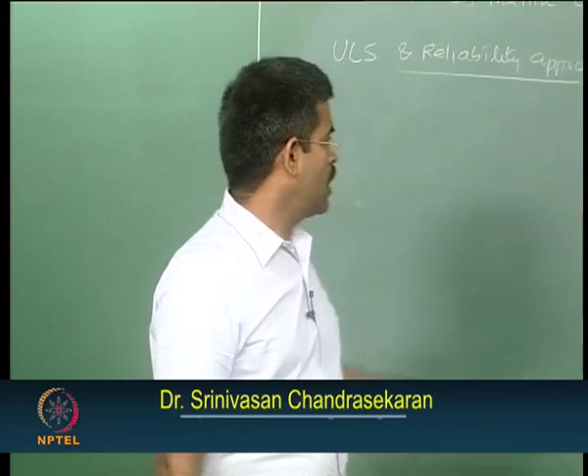In the last lecture we explained how the ultimate limit state in terms of design mechanism, how the partial safety factors can be connected to a reliability approach where R and S are seen as variables in reliability approach, random variables, whereas in design they are not directly seen as random variables, but the effect of their variations or uncertainties are accounted for in terms of using or substituting partial safety factors of load effects and resistance, that is gamma Si and gamma R.

One should be able to estimate these values using reliability theory. Therefore, one can determine deterministically what would be the probability of failure if you are using a specific characteristic value of the load and that of the strength, and using specific safety factors for load and resistance respectively. Now, let us look for

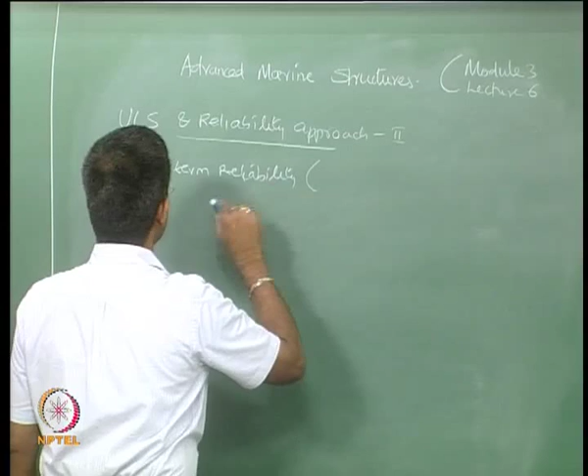short term reliability. To make it easy, let us consider this for a single load effect.

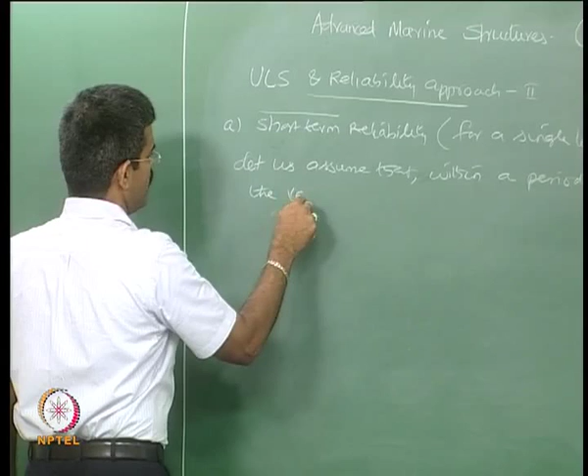First of all, why do we call this a short term reliability? Let us understand or assume that within a period of time, let us say t, the variation in resistance is not valid. What does it mean? It means R does not vary much, not significantly.

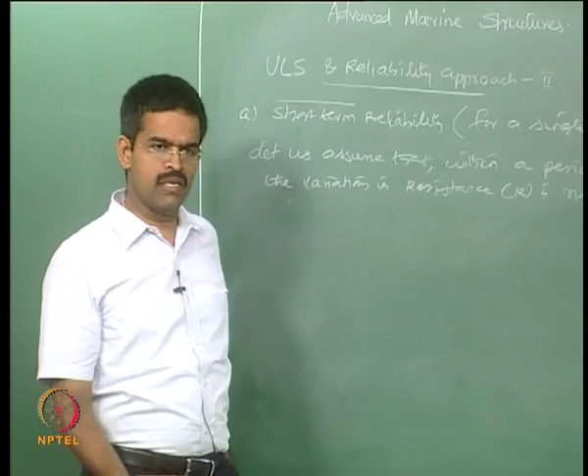This can be true because using the same material for a period of, let us say, structural life of 15 years, and the material has got very high quality control in terms of its manufacturing processes, the variation in terms of its yield strength, modulus of elasticity etc. can be ignored, because the variation practically will not be there, though the variation will be there because of strength deterioration, degradation etc. But let us assume that for a specific short term period, that t we will fix, maybe 1 year, maybe 6 months, maybe 10 years.

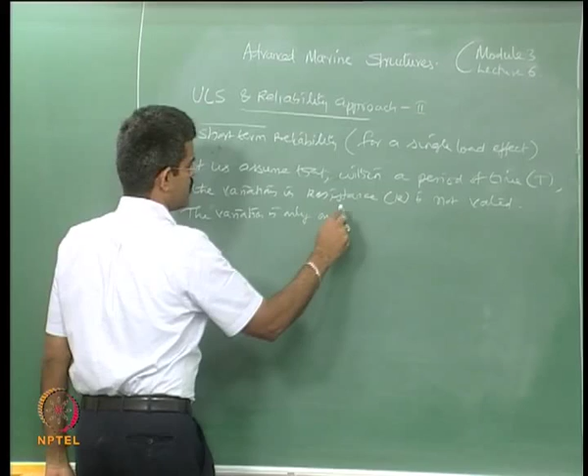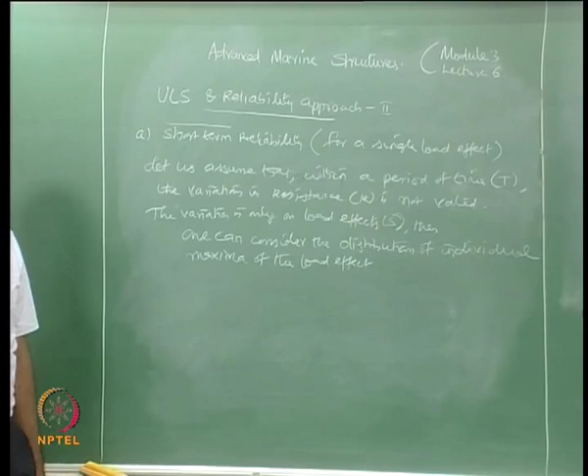For a specific period, if R does not vary, the variation is only on the load effects. Then one can consider the distribution of individual maxima of the load effect, which could be the largest value within the period t. You can consider the largest value, what we call maximum.

In that case, the reliability problem can be framed using what we call extreme value statistics.

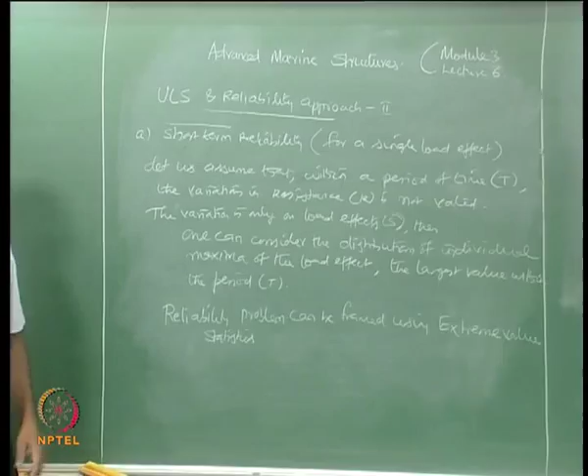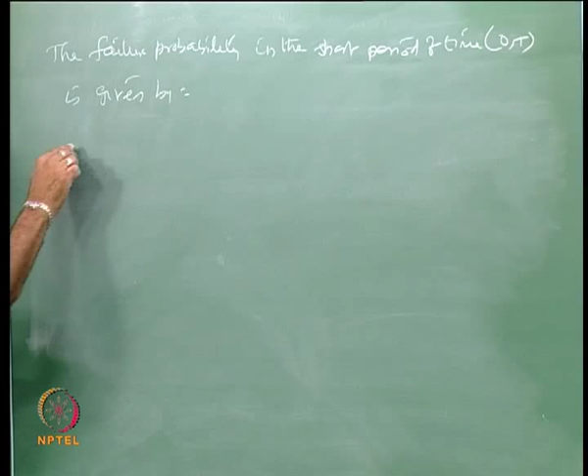So, the failure probability in the short period of time, that is 0 and t, is given by Pf, which is now meant for a specific time, let us say Pf of t, because t is the period where I am looking. One can say however the time period of t is very large, still I can call this a short term, because considering the design period of 100 years, considering the service life of 25 years, any value you take can be considered as a short period or short term.

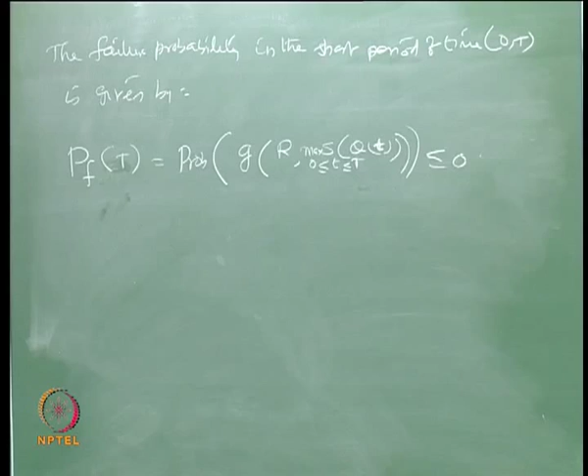So, probability of g of, that is the failure function, which can be a function of r and s max, or let us say s varying from 0 less than t less than t, t is between 0 and t only, and we can now look for maximum of s amongst Q of t, which can be less than or equal to 0. Let us take Q of t, where t is a variable here. This can also be rewritten as the failure function, that is probability of g of r comma s max. I am saying this is an S max value within a period t, which can be less than or equal to 0. I will call this equation number 1.

So, what I am trying to say here is, if the resistance is not considered to vary within a specific time t, consider only the maxima of the load effect, form a failure function and find the failure probability. That is what we call short term reliability.

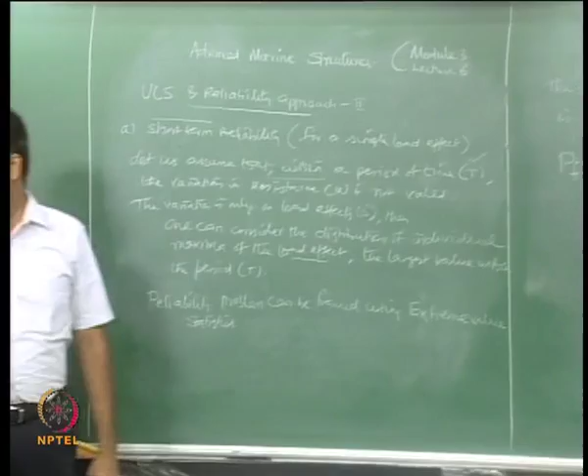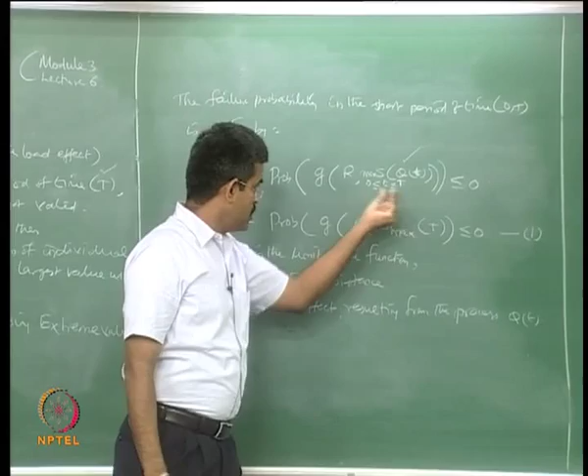Where g is the limit state function, written as g of some function, some parameters. In my case r and s are the parameters. R is the resistance, and S is the load effect, resulting from the process Q of t, that is the load process. I am looking for the maximum value in the given load process within a period 0 to capital T. I can also call that S max. That is what the language of this failure function means.

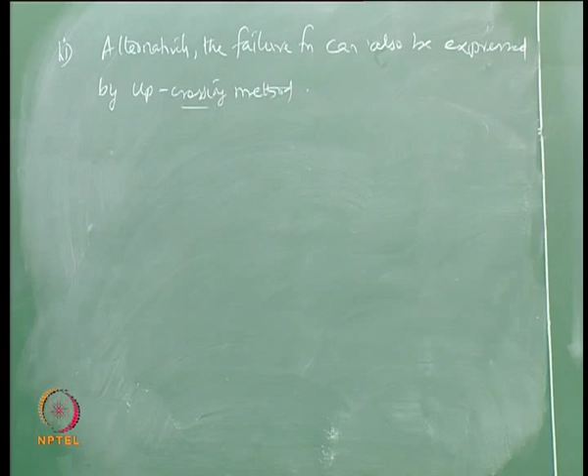There is another approach, a second approach for this. Alternatively, the failure function can also be expressed by the upcrossing method. Let us see what this upcrossing method is. In this method, the upcrossing rate is established.

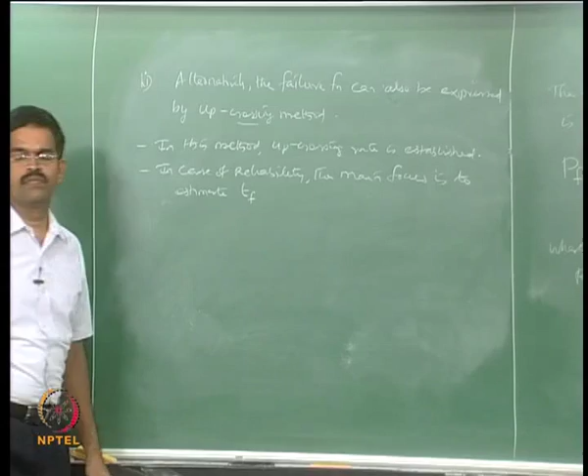So, in case of reliability, the main focus is to estimate T suffix f, where T suffix f is the time of first failure.

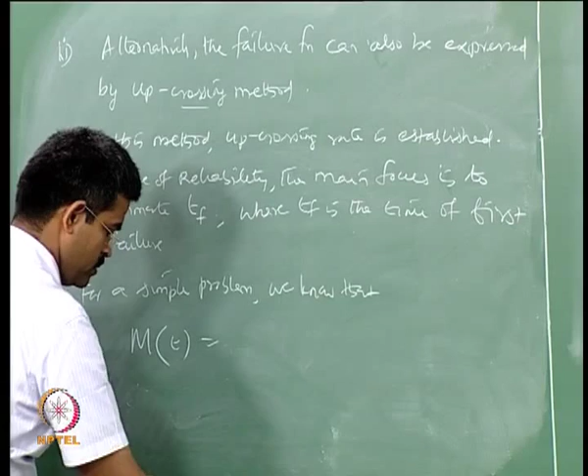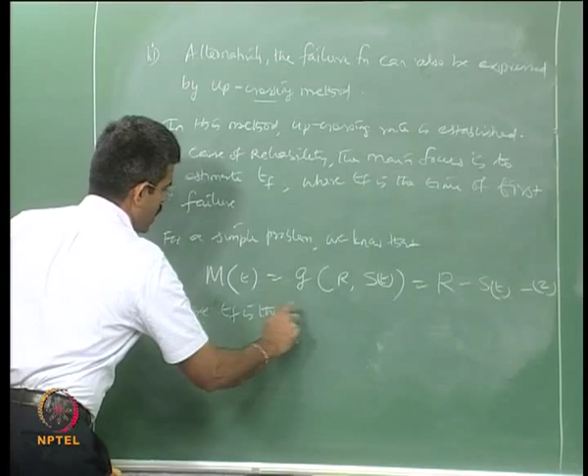So, for a simple problem we already know that the safety margin m of t is a function of r comma s of t. I think you will agree that I am not writing r as a function of t, since we already said that r is not varying, which gives the margin of safety as equation number 2: r minus s of t, where Tf is the first time when m of t is 0, that is, failure.

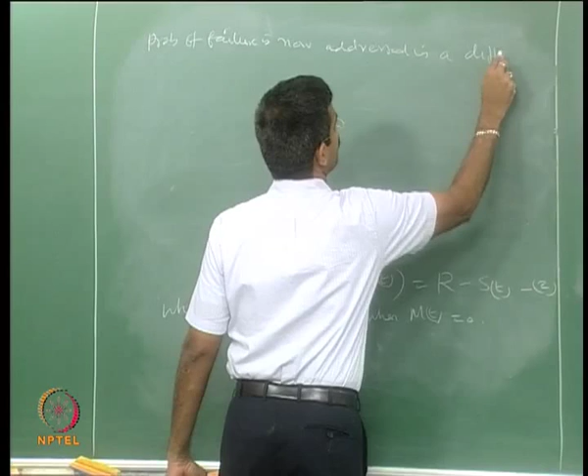So, probability of failure is now addressed in a different form, as given below. Instead of looking at r exceeding s or s exceeding r, I am now going to look at what is the time when m of t becomes 0, and what is the time at which this occurs for the first time. I am just rewriting the problem into a failure function and writing this probability of failure in terms of estimating Tf, that is called the upcrossing rate approach.

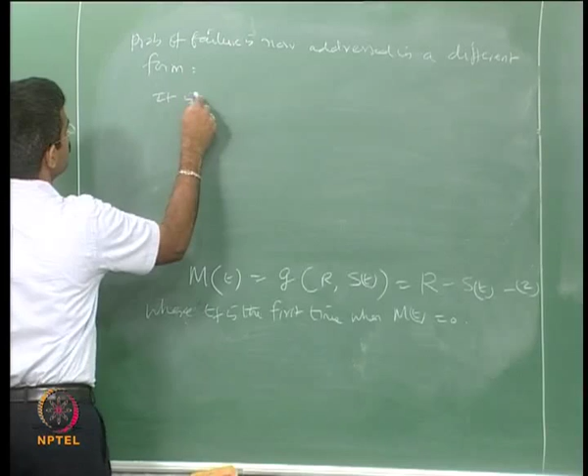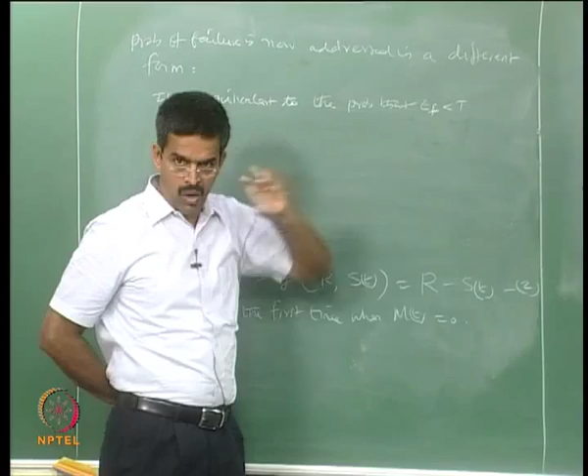So, it is equivalent to the probability that Tf is less than t. It means within your short term time t there is going to be a failure, that is what probability of failure is. If within your capital time t the failure does not occur, the probability of failure is 0, 100% reliable, is it not? So, I am looking at the problem in a different perspective, saying what is the probability that Tf less than t can occur. What is Tf? Tf is the time at which the first failure has occurred. Is it very clear, right?

So, I am looking for a short term reliability where I am trying to find out the upcrossing rate of this function, which is r minus s or margin of safety, and what is the first time at which this is going to occur, and what is the probability that this will occur within t. That is my problem now.

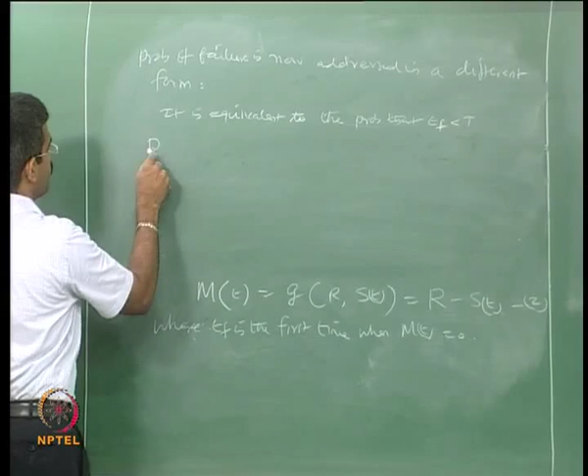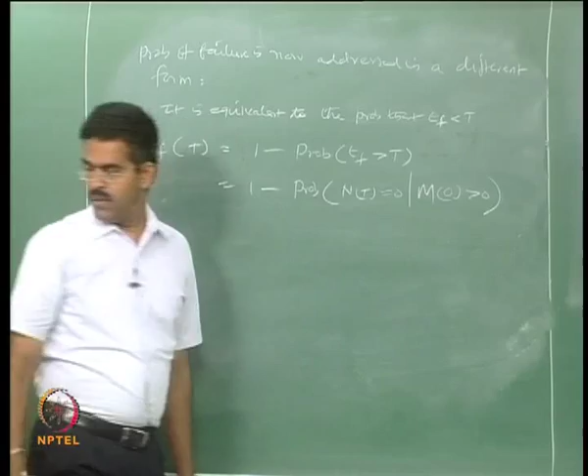So, I can write the probability of failure now as a function of t, which is 1 minus probability of Tf greater than t, is that correct? Because Tf less than t is a failure, which can be said as 1 minus probability of n of t set to 0 given m is the margin of safety, m of 0 greater than 0, multiplied by probability of m of 0 greater than 0. I call this equation number 3, 3a and 3b. There is a multiplication here, I do not have space so I have written it like this.

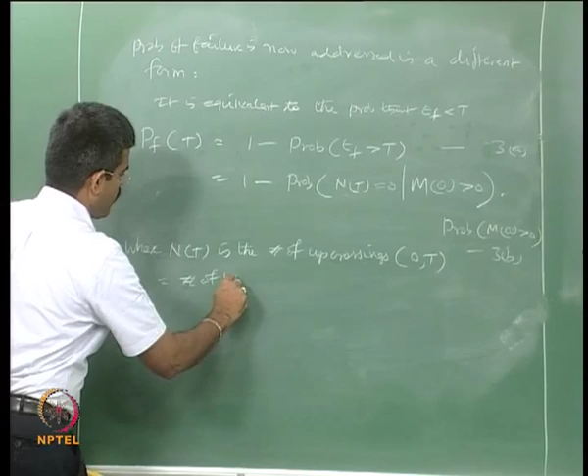Now, the question is, what do you understand by n of t, where n of t is the number of upcrossings within the interval 0 to t. Since I am saying n of 0 to t, that is the number of upcrossings from the safe domain to the failure domain. I mean, how many times your margin of safety is not satisfied.

What is margin of safety? R minus S of t. If R minus S of t is set to 0, it is on the border. So, you must first know the condition, what is the margin of safety. Given that condition, how many times this has occurred, that will be the probability of failure.

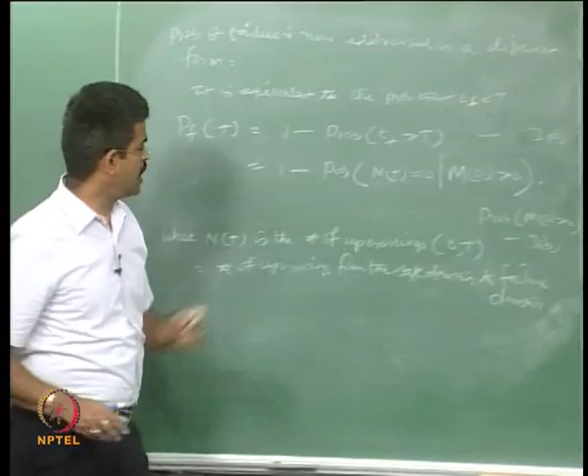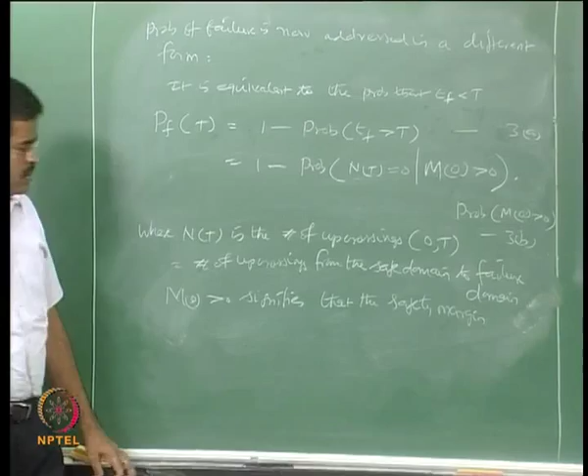Now, in this case, m0 greater than 0 signifies that the safety margin, what do you mean by m greater than 0? R is greater than S. Is it safe or unsafe? Safe. So, m greater than 0 indicates safety margin, where m of t is R minus S of t, is in the safe domain.

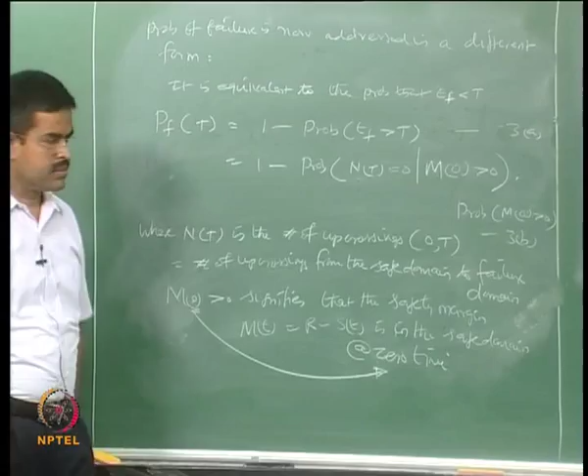At 0 time, that is why I have used 0 here. At the 0th time this will be applicable, it is safe. Now, from 0 to capital T, what is the probability or how many number of times this has been violated? That is my probability of failure. Now, in this example or in this derivation, calculating Pf of t is a complex task.

It is a complex task. Therefore, an approximation is made, an approximation of n of t.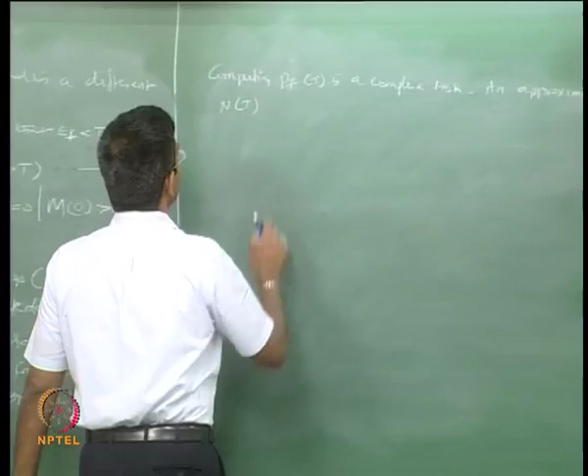n of t is assumed as Poisson's process, and this is adopted to compute Pf of t.

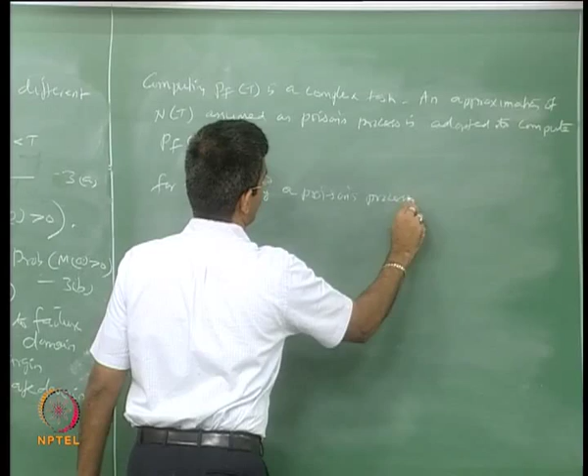What does it mean when I say n of t is a Poisson process? It means that for n of t being a Poisson's process, the upcrossing level of R and S of t are independent. They happen independently.

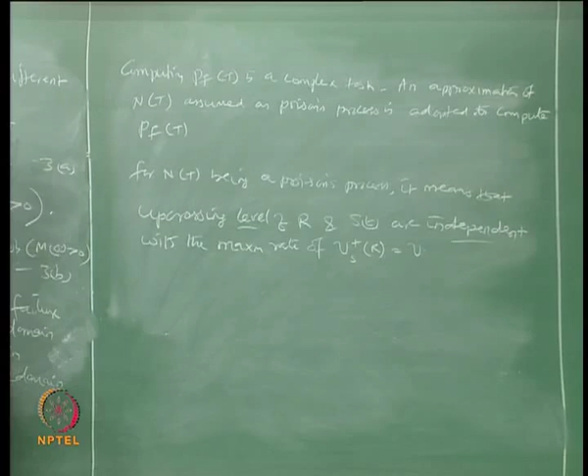With the maximum rate of Vs plus R is equal to Vm minus 0. So, whereas Vs plus R is the maximum rate of upcrossing, it is indicated as Vs plus R, and this happens per unit time.

That is why it is called the rate of upcrossing. So, now probability of n of t exceeding 0 upcrossing, or let us say equal to 0, because upcrossing means it is 0.

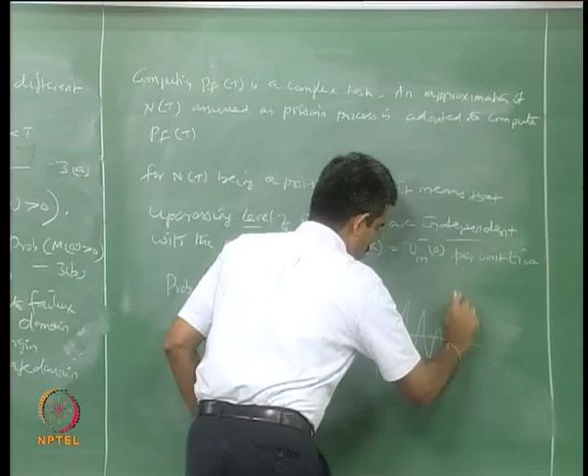You have a signal, for example, you want to find how many times the signal has crossed 0, you look for only the forward slopes, and so on, how many times it has crossed in a given t. So, for identifying the forward slopes you must look at this value equal to 0.

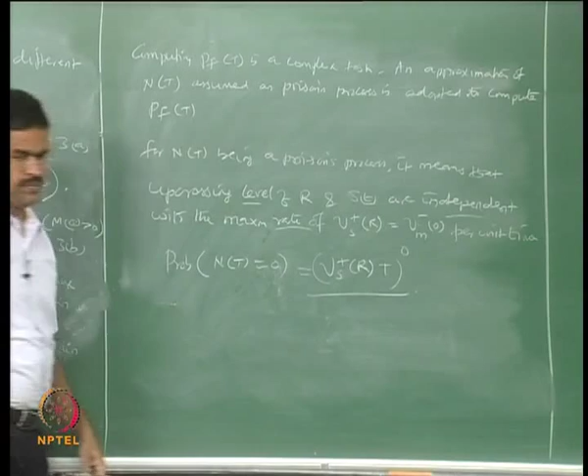So, probability of n of t set to 0 can be given by, now using the maximum rate of upcrossing, Vsr plus now, Vsr, this is R, of t to the power 0, divided by 0 factorial, that is a general expression.

E to the power of minus Vsr of t, which can be simply E to the power of minus Vsr of t. Can call this equation number 4a and 4b.

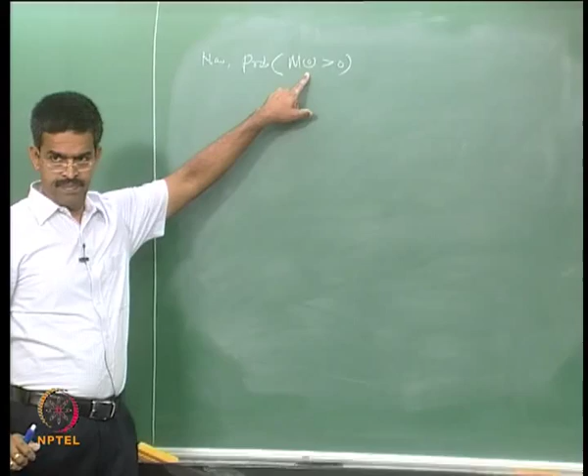Now, the probability of m0 greater than 0, that is safety margin at the 0th time, is nothing but 1 minus probability of failure at 0, is it not? Which means that there is no failure at t equals 0, agreed?

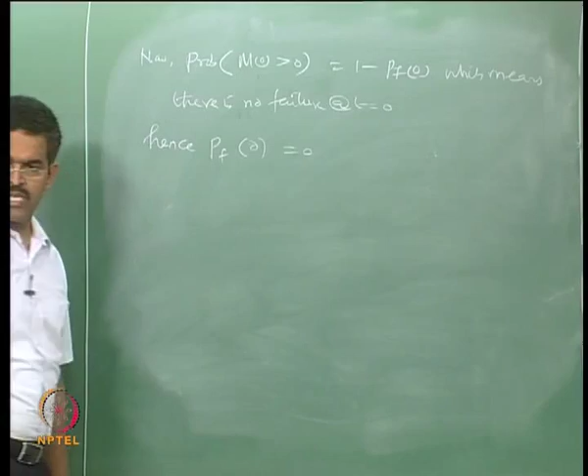Hence, probability of failure at 0 can be taken as 0 because there is no failure at 0. Then probability of failure at t can be approximately given by 1 minus, using this, e to the power of minus.

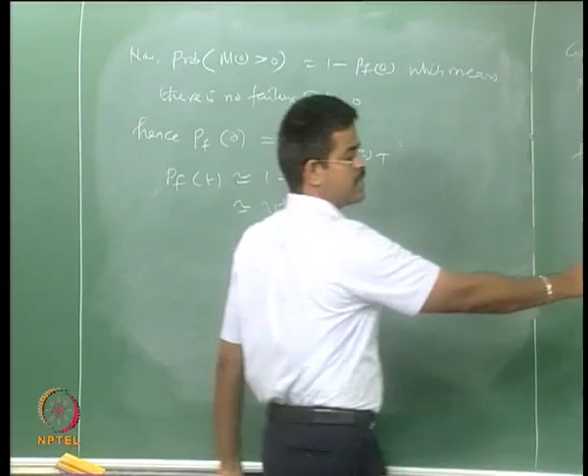Vs plus r of t, which can be approximately Vsr of t, this is approximate, which can also be said as, we already said this here, Vm minus of 0 of t, called equation number 5.

Now, as a special case, if S of t is a Gaussian process, then V of s plus r can be said as V of 0 exponential of r minus mu s, the whole square by 2 sigma s square. It is an exponential value. I call this equation number 6.

Where V0 plus this value is the same as Vs plus of 0.

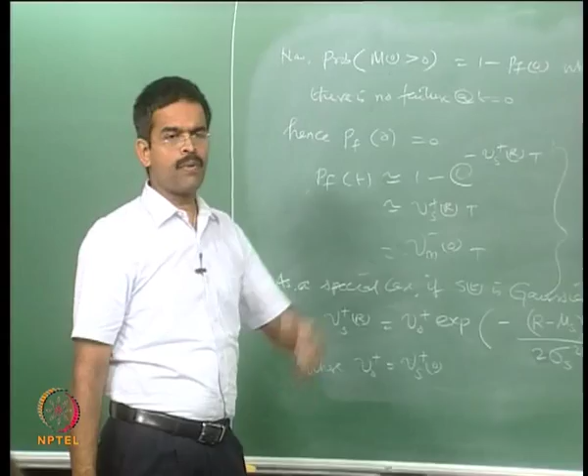So, this is a second approach by which I can find out the probability of failure using the upcrossing rate, Vs plus R0, for a short term reliability where R is not varying significantly, whereas load effect S is varying significantly within a period of 0 to capital T, and I am looking for Tf, which is the first time at which this failure has occurred, and n number of times this failure has occurred or the margin of safety is violated, thinking that at 0 it is absolutely safe.

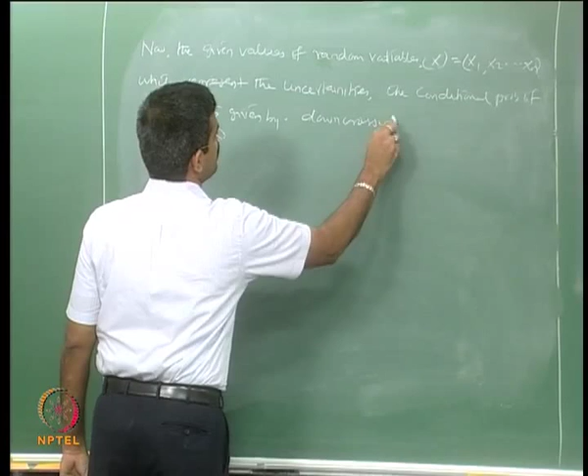The down crossing of m of t. So far we have been seeing the upcrossing of m of t and x, for t greater than 0.

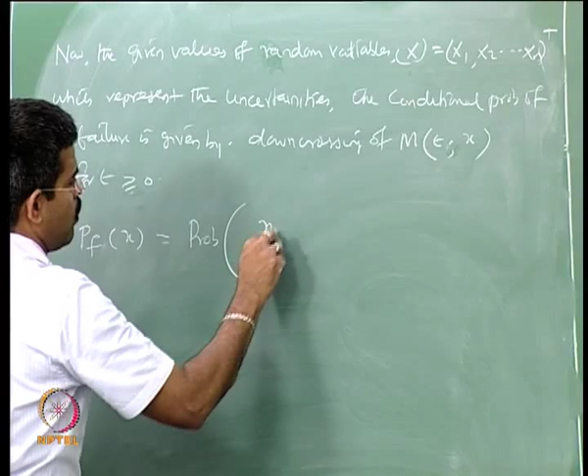So this can be given by the probability of failure of x, which is a random variable, varies from x1, x2, x3. Please make a correction here, the random variable is a transpose of this, it is a vector, can be given by the probability of minimum value of, earlier we looked at the maximum value, if it is S effect. Now I am looking for the margin of safety, so I should look for the minimum effect.

Marginally it is unsafe or safe, margin of safety. So minimum value of 0 less than t less than capital T, same argument, m of t given x, for a given set of x I am looking at m less than equal to 0. What does it mean, less than equal to 0? R is less than S, so it is unsafe.

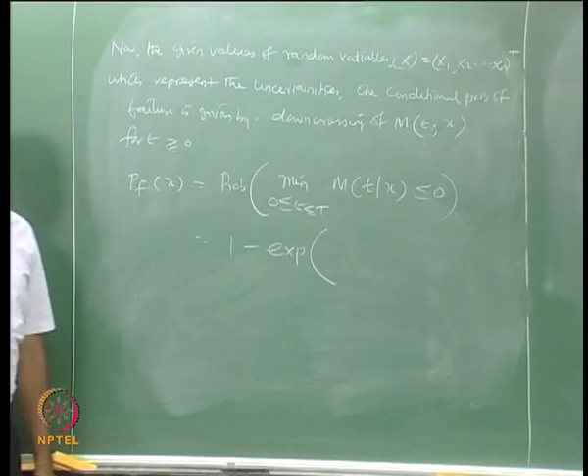That is a failure, which can be said as 1 minus exponential of minus Vm minus of 0. I am looking at the down crossing, therefore I am putting minus here. Down crossing means negative, which is happening, arguments are 0 and x for a given t.

I can call this equation number... 7, 0 of t. Let me check this expression.

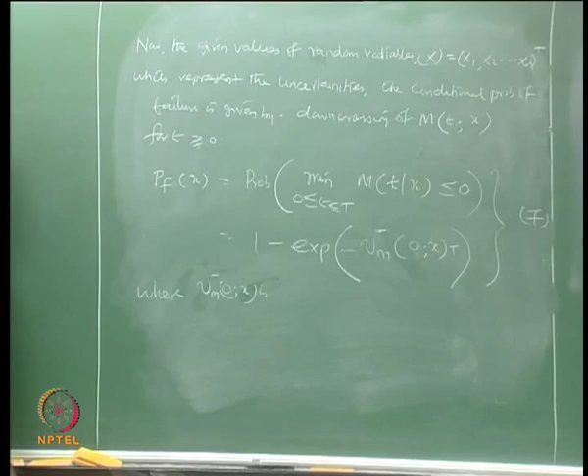Where Vm minus of 0 x is a 0 down crossing rate of margin of safety, which depends on the vector x, and the vector x is a function of r and s. Okay, margin of safety is nothing but r minus s.

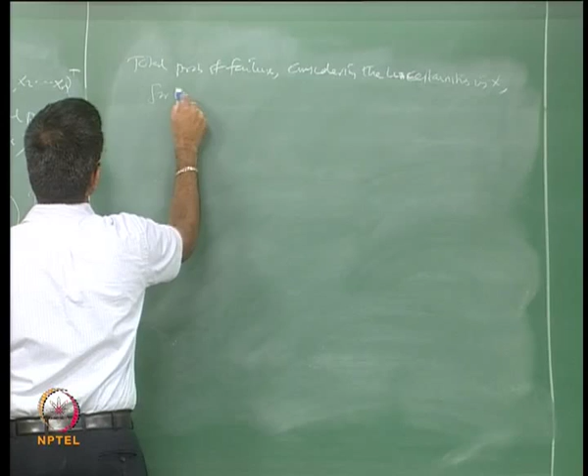Now, the total probability of failure considering the uncertainties in x, for the given conditional probability, can be said as probability of failure. Okay, now let us make it unconditional, for the given unconditional, this is unconditional.

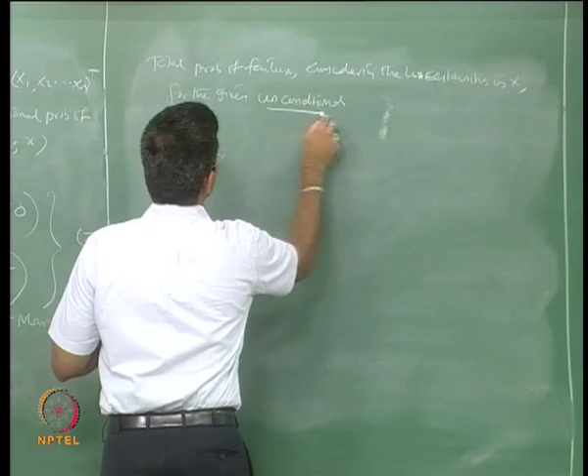Is given by probability of failure, which can be the integral over the domain x, that is the random variable set, P of x, f of x, dx. This is capital X. Equation number 8.

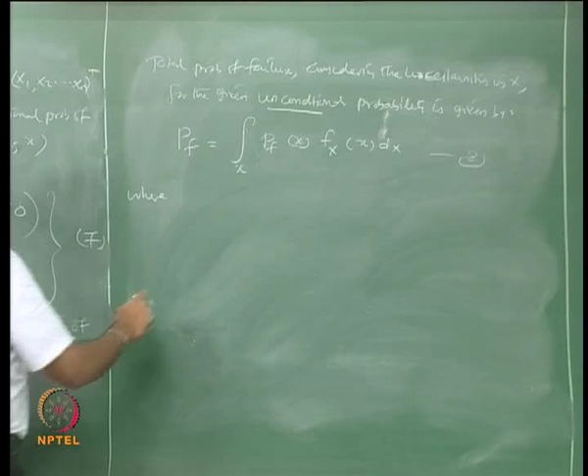Where the integral represents expected value of the variable x, or the probability of failure, because it is not the variable, it is the probability of failure of x. Hence the average value is given by

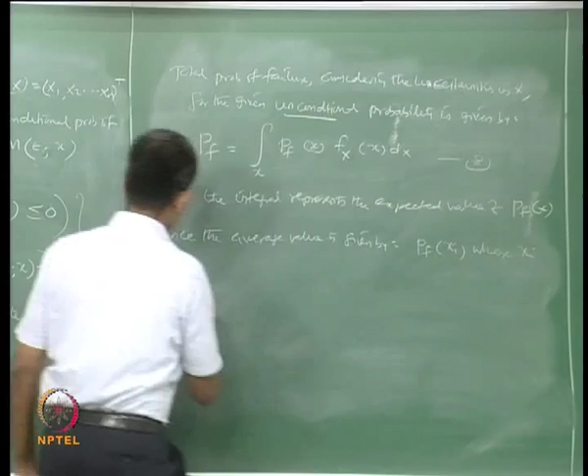P of xi, where xi are generated by Monte Carlo simulation. Therefore, we can say P of f in this case is going to be an average of n values, equation number 9. Of course, this is an approximate value, okay, cannot be accurate.

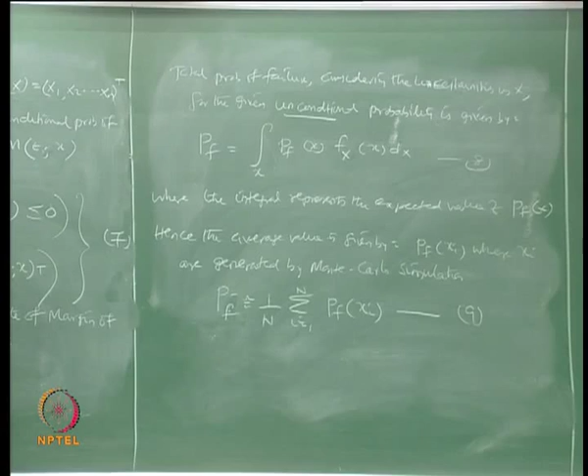So, this is the short term effect of reliability for a specific time period t, where R is not varying significantly compared to that of load effect S. Now, let us look at the long term variability.

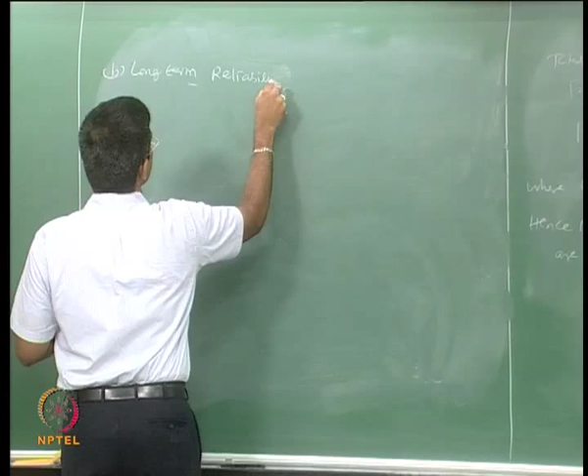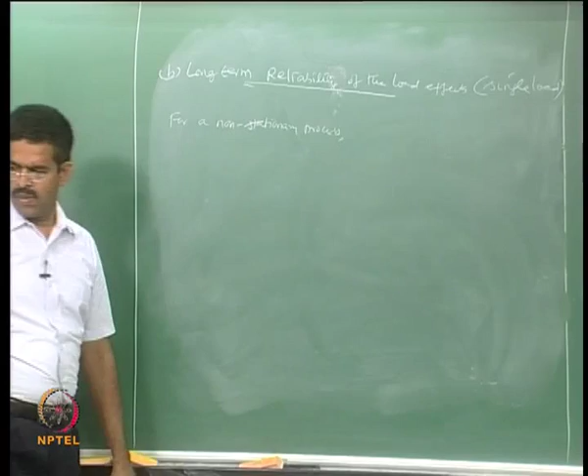Not variability, actually it is long term reliability. Of the load effects. Long term reliability, we are talking about the single load here. Earlier also we discussed about the single load only. So, now let us say for a non-stationary process, which is let us say m t of x, some process which could be for a long term period.

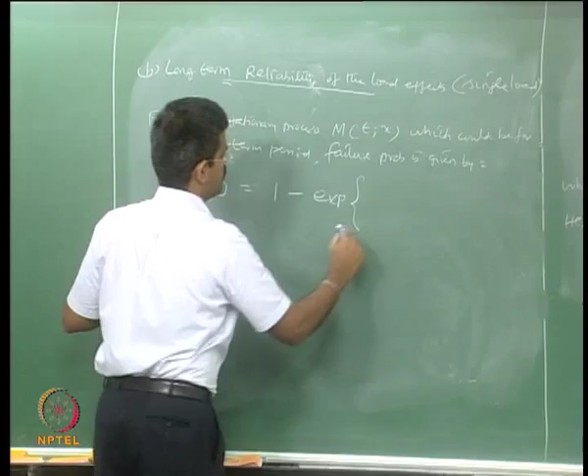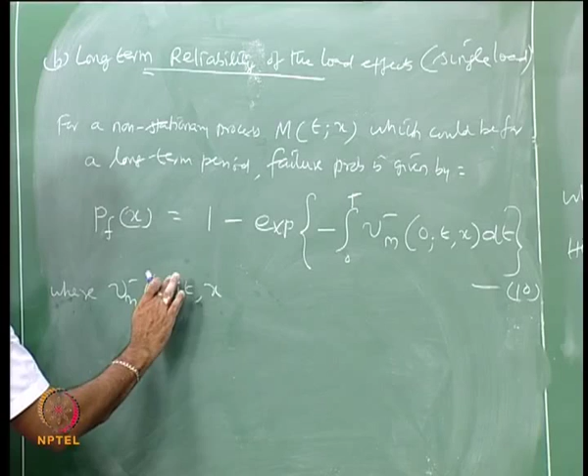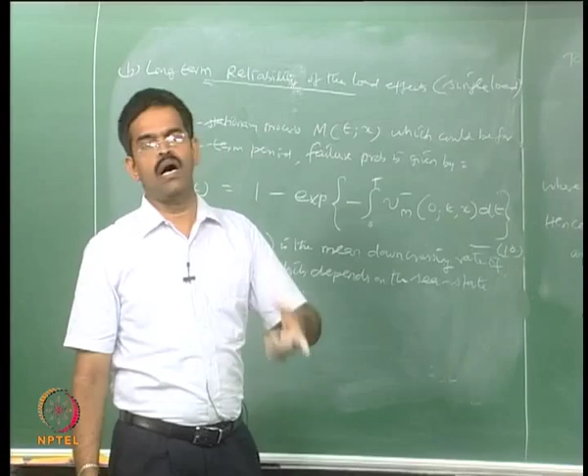for a time period dt, that is a variable. So, I can call this as equation number 10, where Vm minus of 0 t and x is the mean down crossing rate of margin of safety, which of course depends on the sea state, which sea state that changes with time. Why I am saying only sea state? Already we are saying that the variation in R is not significant with that of S. Variation is included here because I am not binding this for a specific value of t, I am taking any time t.

If you look at the previous expressions, it was maximum or minimum of the failure function between 0 small t and capital T. So, we are looking only in an interval of 0 to t, but here it is an open domain, any time t. But even in time t, we are saying the process is non-stationary, which is a margin of safety process, having factors R and S, but the variation in R is not significant compared to that of S, because S is varying significantly due to the sea state variation with time.

Suppose if you know for a given sea state, I can acquire the following details. For a given sea state, if the following are acquired. What are they? Which we call them as captured values.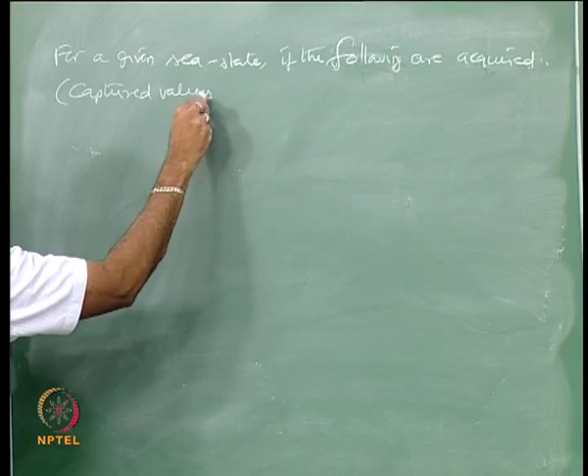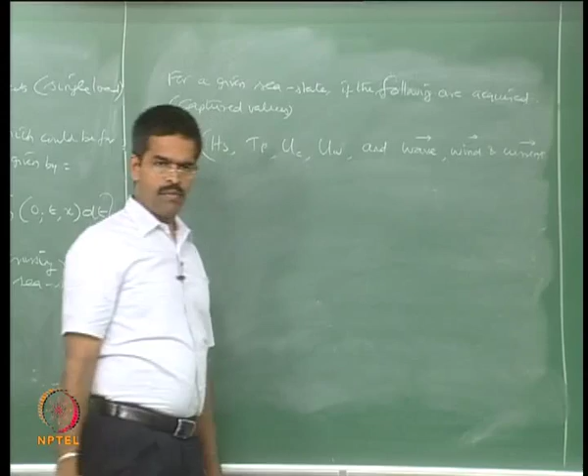What are they? HS, significant wave height, TP, spectral wave period, UC, current velocity, UW, mean wind speed, and also the predominant direction of wave, wind and current. If I am able to collect them or capture them and put these values in a subset called W, capital W,

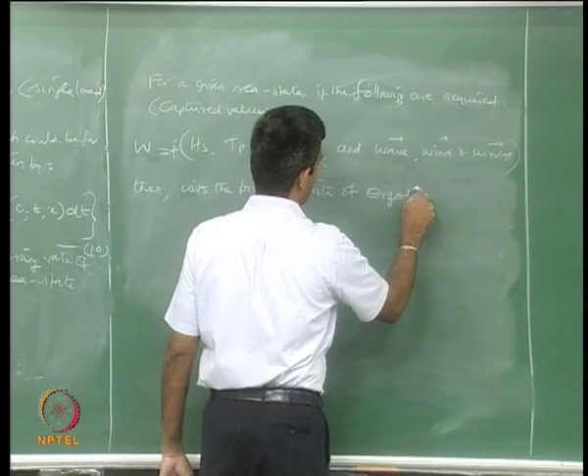then with the prerequisite of ergodicity assumption, ergodicity. What is an ergodic process? I want you to look back in the standard statistics and understand. Otherwise, they may be available in some other parallel coursework given in NPTEL, in some other literature. In fact, I can quote one of the courses I did on dynamics. We discussed about the random process in dynamics, where we discussed about ergodicity, stationarity, everything. Please look at that, you will understand what we talk about here.

So, we have a captured set of values, and we also say there is a prerequisite that these values are ergodic. That is an assumption.

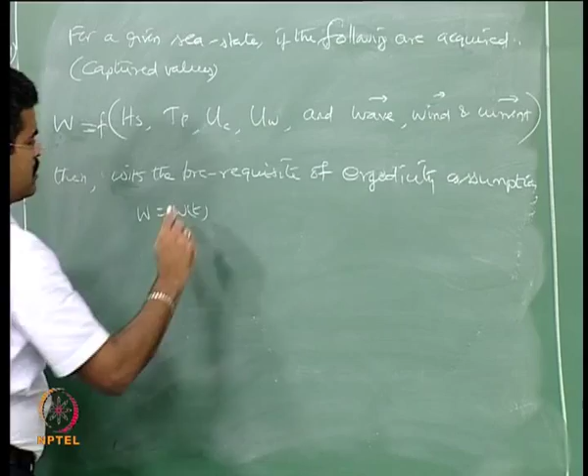Then W can be written as W of t, and probability of failure of the variable x can now be said as 1 minus exponential of minus t for a domain of W, because my W is a captured value now. Instead of saying 0 to t, I have captured these values for a specific period, and they are ergodic in nature. Therefore, I am rewriting this expression, equation 10, in a different form.

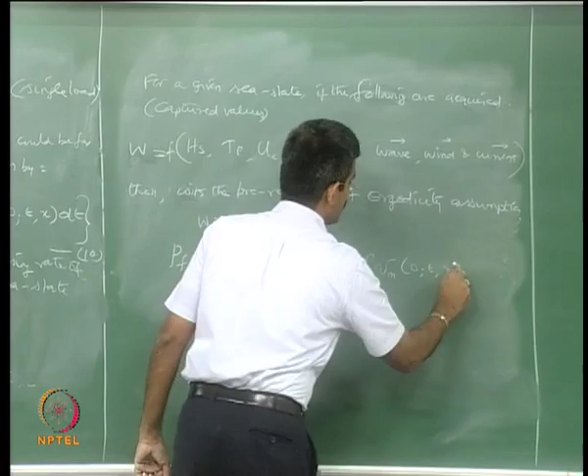Vm minus of 0, Tx, okay instead of t I should say W, because that is my argument now here: F of WW dW. Is that clear? I can call this equation number 11.

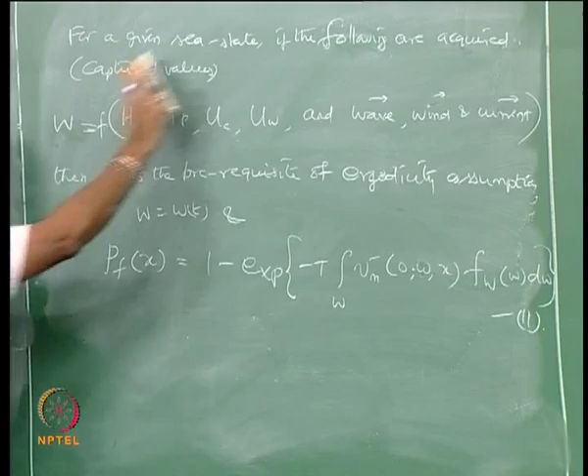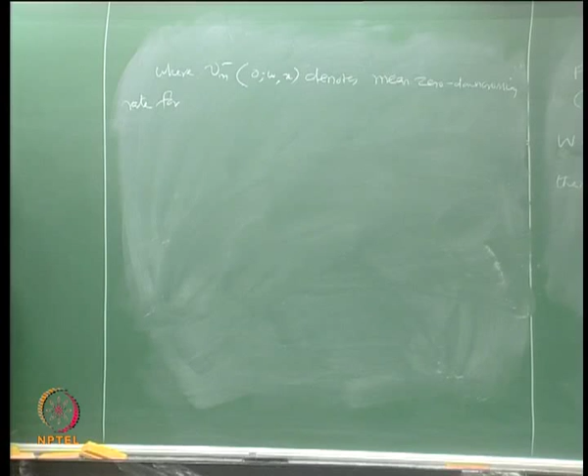where again Vm minus of 0 Wx denotes mean zero down crossing rate. Why down crossing? I am using minus here; up crossing means I have to use plus. For down crossing rate, for m, for the sea state W, it is not for T. I should say very specifically sea state W equals W, because W are the set of captured values.

Now f of WW, the one which is shown here, is the probability density function of this W.

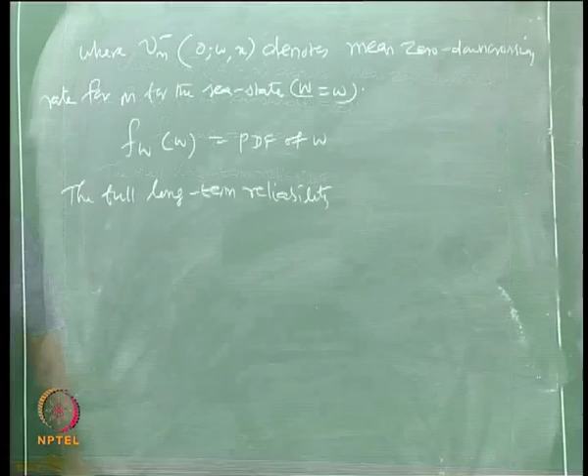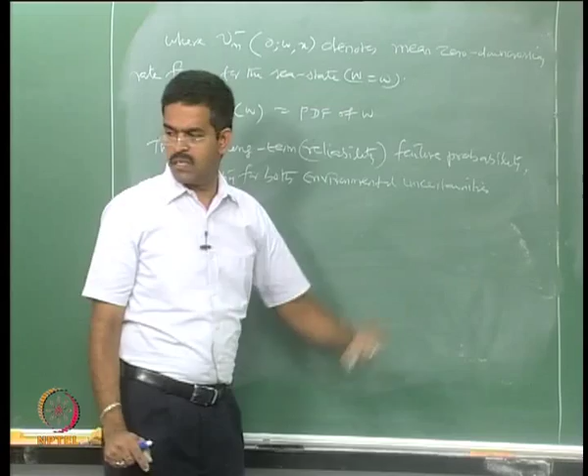Therefore, the full long term reliability, or I should say long term failure probability, one and the same, long term failure probability accounting for both environmental uncertainties. How can you say it is accounted for environmental uncertainties? Because W is a captured value which I have for specific variations including the directions, and their probability density function also I have. So it is accounting for environmental uncertainties and variability in the parameters.

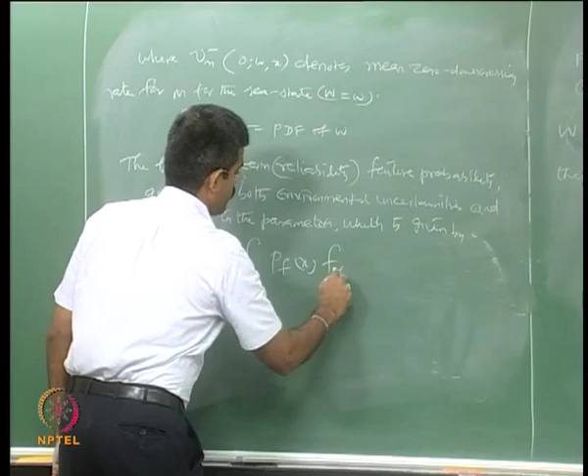Which will be given by probability of integral over domain x, probability of x, which is f of x dx, equation number 12.

So in this lecture we have understood what is called short term reliability and what is called long term reliability. In short term reliability there are two approaches we discussed. The famous and common approach is upcrossing rate of the margin of safety, where we have arrived at the closed form solution for a single load effect of S.

For a long term effect we have used a different methodology of approach, saying that the process is non-stationary. Instead of finding out Tf, which is the first time at which the margin of safety is violated, I am looking for a domain now where T is transferred to a captured domain of W, small w, where I know all these parameters captured for a given sea state. Now, I account for this variability and the parametric variation for a given sea state. I am not saying for a given T, I have transformed the T domain to a captured value domain W. That is how we have said my variation is on the domain W.

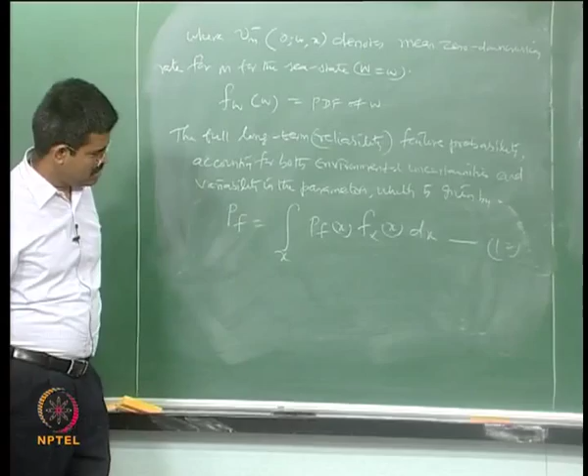So the expressions, I think equation 8 and 12, will give you the probability of failure for a short term reliability and a long term reliability respectively in this discussion.

Now, the question comes, having understood the different levels of uncertainties, having understood its short term and long term effect, having understood the connectivity between reliability and ultimate limit states, which we have seen in the last lecture, what are the different levels of reliabilities, what are the factors affecting each level of reliability, we must discuss this. Once we understand this, we will take it forward and understand what do we mean by methods of reliability, like FOSM as a method, AFOSM as a method, etc. There we will end the discussion on this module on reliability of marine structures.